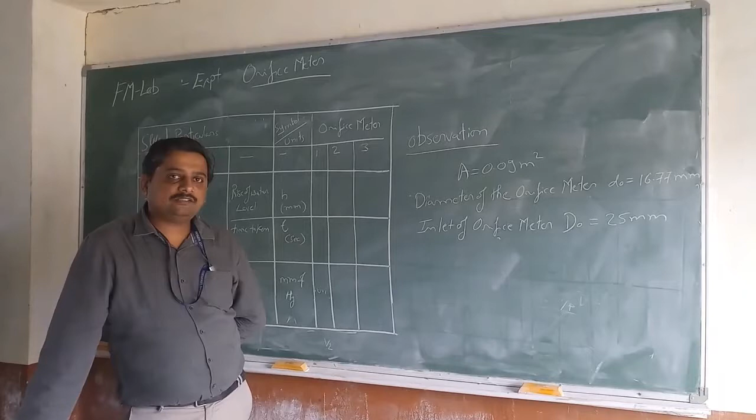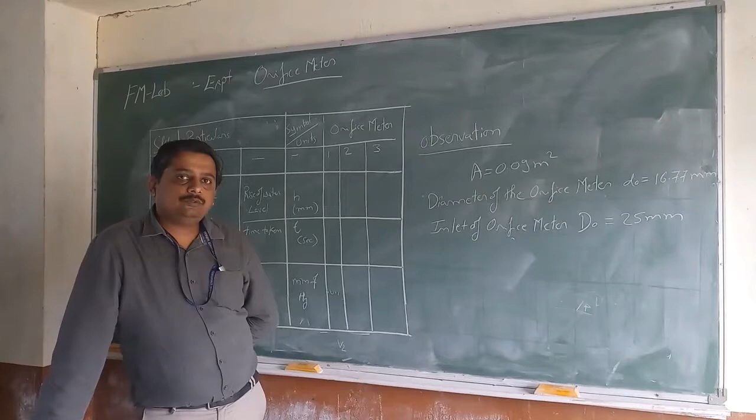Today we are going to see the experiment on the orifice meter, and this experiment is a part of the fluid mechanics lab for the 4th semester as per the VTU curriculum. The orifice meter is a flow measuring device which is used in a pipe, and we need to find out Cd here.

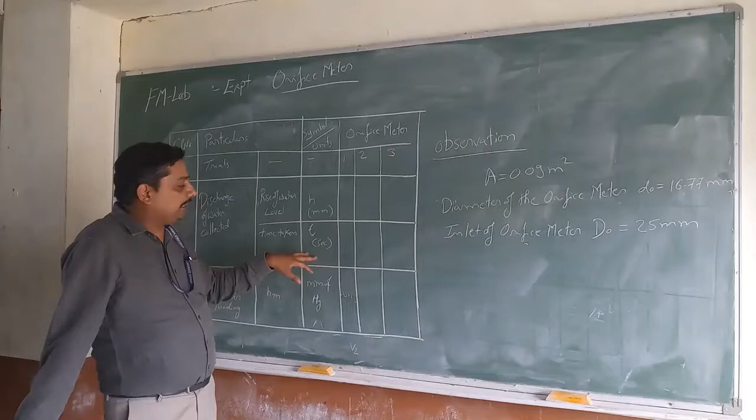The aim of the experiment is to find out the Cd value, that's the coefficient of discharge, and this is the observation table. You need to find out the discharge of water collected with respect to a rise in height of water of 10 centimeters and the time taken to rise to 10 centimeters height.

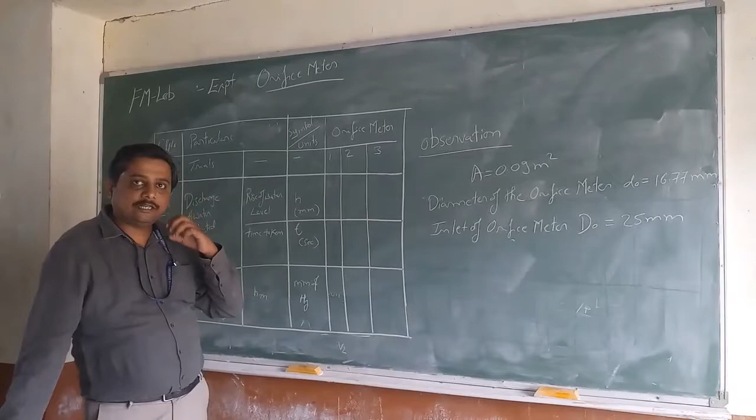You need to find out the differential manometer reading with respect to the left limb and right limb, given as H1 and H2. We need to find the difference of that for each set of readings. The observation here is the area of the tank, that is 0.09 square meters.

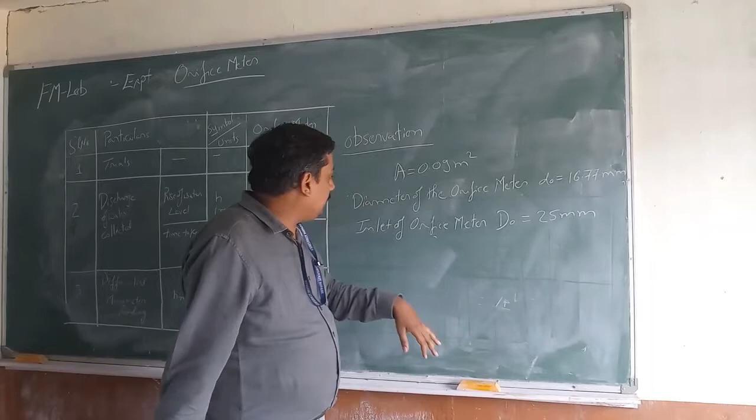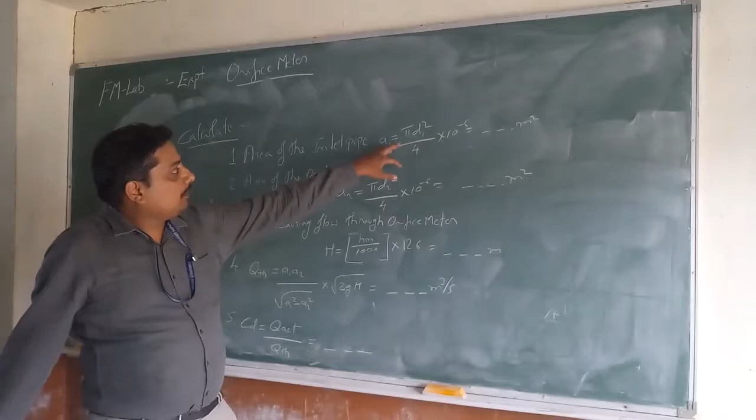The diameter of the orifice, that is D0, equals 16.77 mm. The inlet diameter of the orifice meter, that is D1, is 25 mm. We are going to find out the area of the inlet pipe, that is A1 equals pi D1 square by 4 into 10 raised to -6, in square meters.

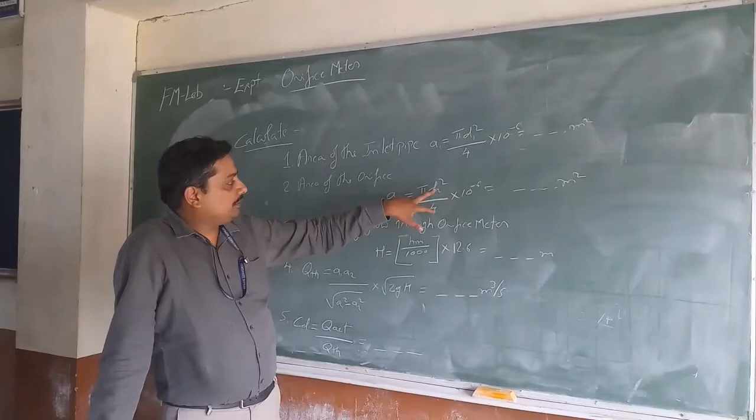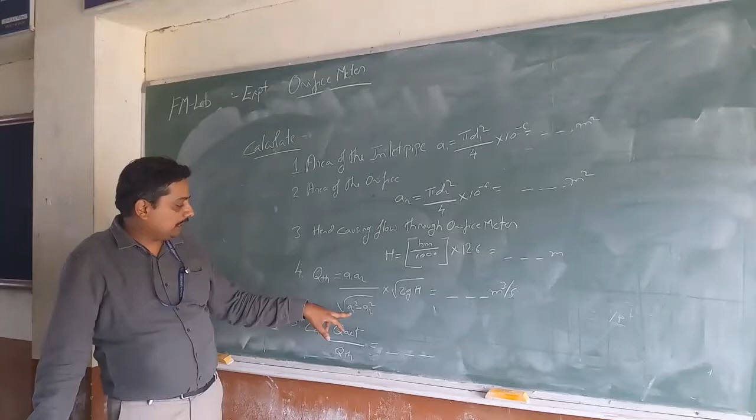Again, the area of the orifice, A2, is pi D0 square by 4 into 10 raised to -6. Then we are going to find H, that is Hm by 1000 into 12.6. Then we find Q, which equals A1 into A2 divided by root of A1 square minus A2 square, into root 2gH. Then we are going to find Cd.

So Cd is nothing but Q actual by Q theoretical. We are going to do this in the next coming videos.

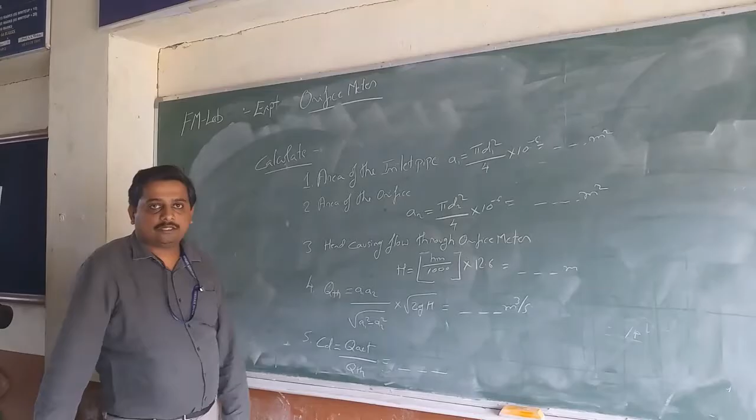Hi everyone. Today we are going to see an experiment of the fluid mechanics lab, which is a part of the 4th semester as per the VTU syllabus. Today we are going to take up the experiment on the orifice meter. This is an orifice meter which has a circular plate inside it. It has a hole, and the hole dimension will be half of the diameter of the pipe.

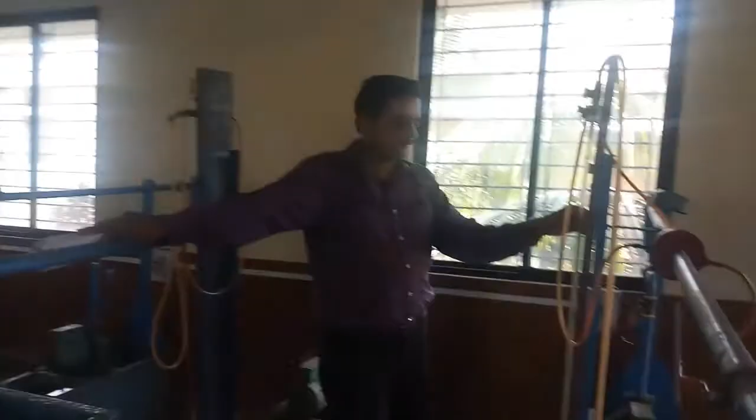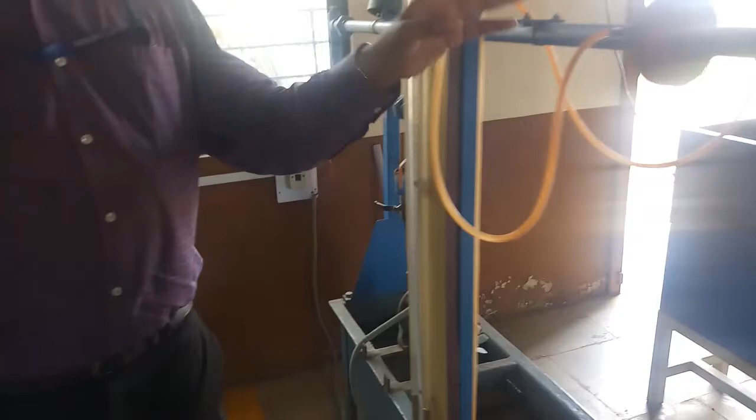It's a flow measuring device, and it is connected to a differential manometer. You can see here this is a U-tube differential manometer. We have a centrifugal pump here, which is used to pump the water, and the water is allowed to pass through this orifice meter.

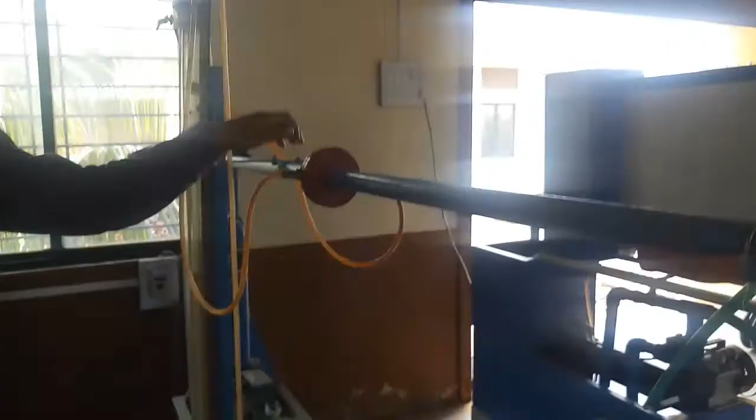Then it is collected where we measure the actual discharge, and then it is passed back to the pump. So what's the aim of this experiment? The aim of the experiment is to find out the Cd value, or you can say it's a verification of Cd.

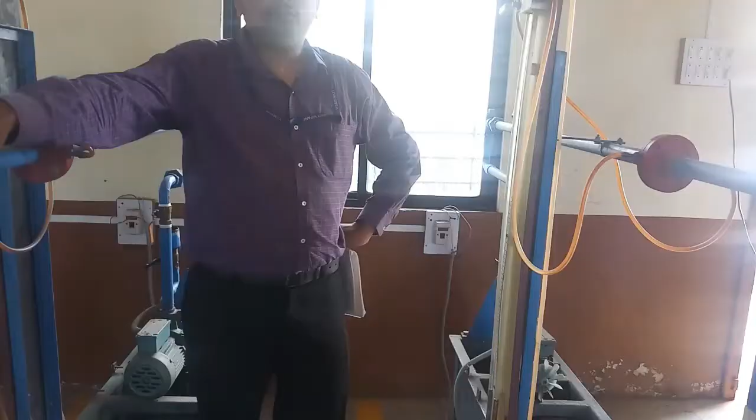So what we are doing here is finding out the Cd value, or verifying, or you can say calibrating the orifice meter. You can use either word: calibration, or finding out the Cd value. The Cd value here lies between 0.6 to 0.65.

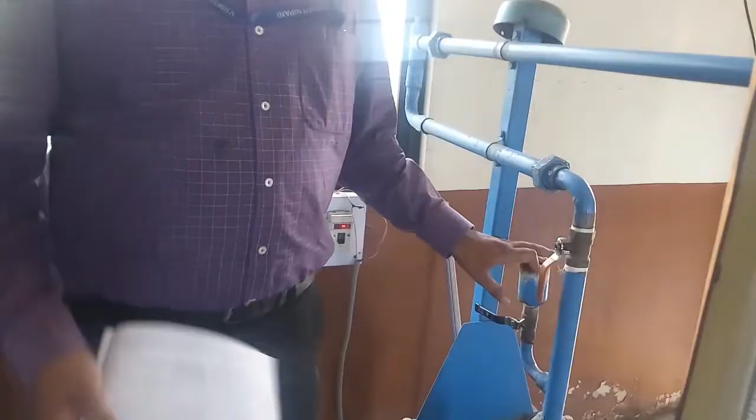So how to conduct this experiment? First you need to start up the pump. Before you start up the pump, you do the timing work. Put the reading here. There are two limbs, one is the left and one is the right limb.

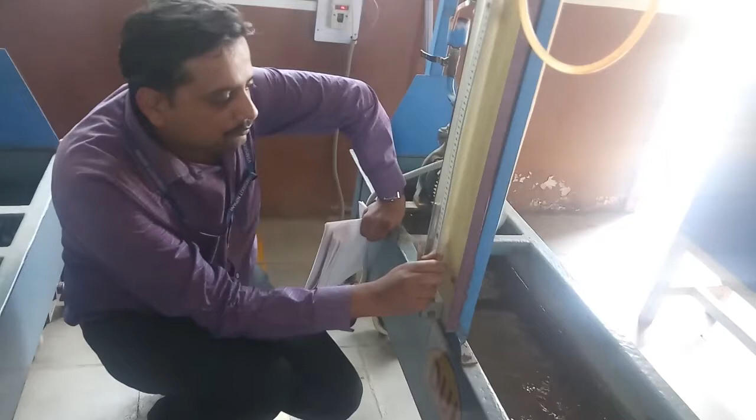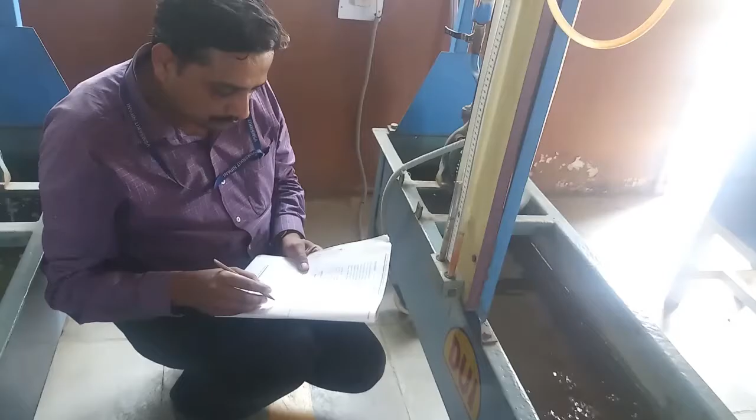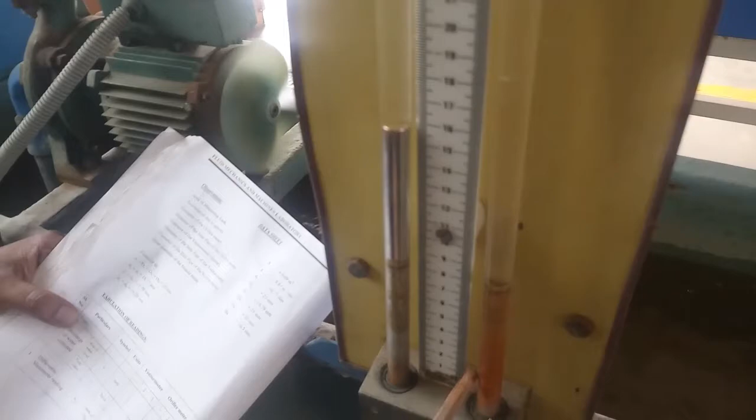Now with respect to the differential manometer reading, you can see here the left limb is around 15.8. So I am going to write that value, 15.8. Now the right limb is around 1.8. So I am going to write the value of the right limb here.

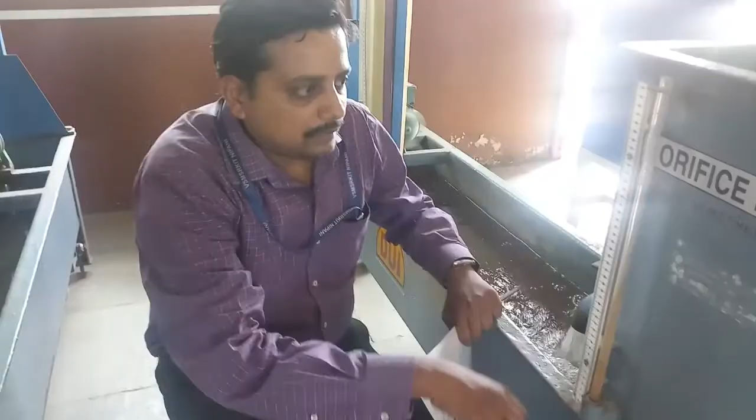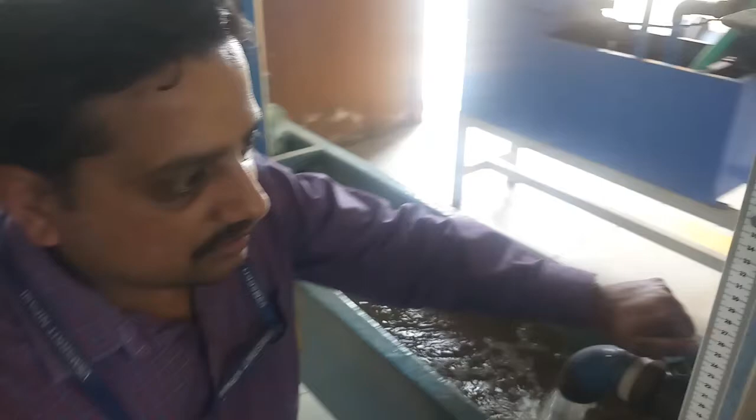That is 1.8 over here. Now what I'm going to do here is take, imagining a height of 10 centimeters, how much time it is taking to fill that water. So now I'm going to close this discharge valve over here. Okay, I'm going to put a clock around 24.

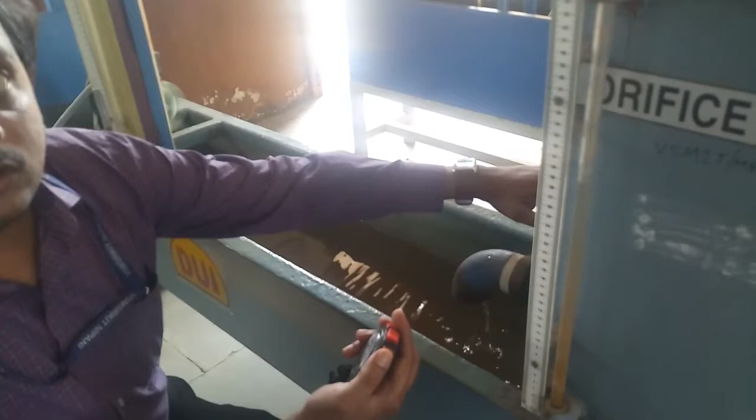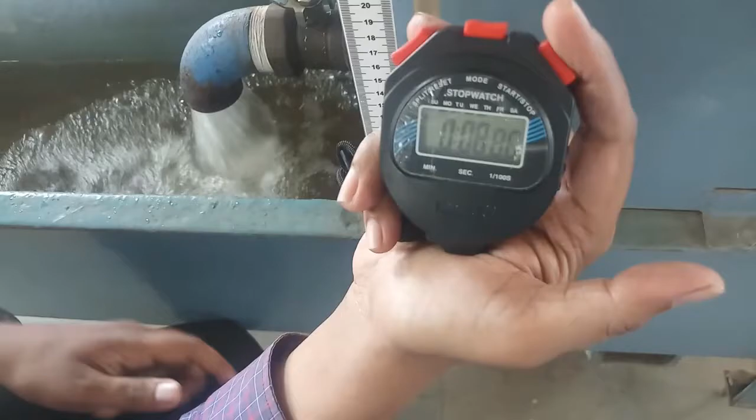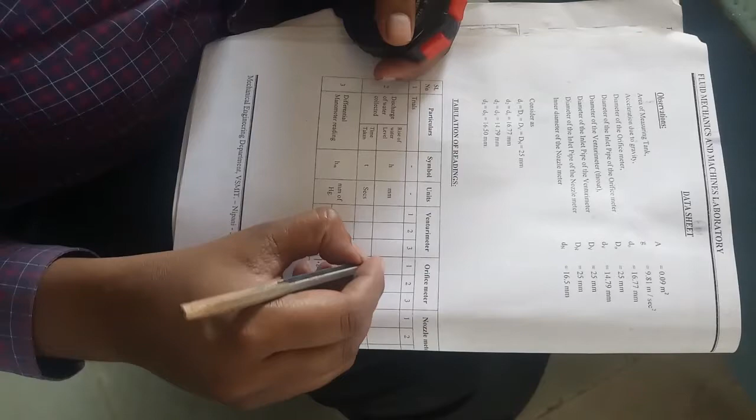So I'm going to start with respect to 24. I'm going to take the reading with respect to 34. So now with respect to 34, it is around 8.88 seconds. So I'm going to write that seconds like 8.88. So the height is around 10 centimeters. So that is around 100 mm over here. Okay. So this is my first set of reading.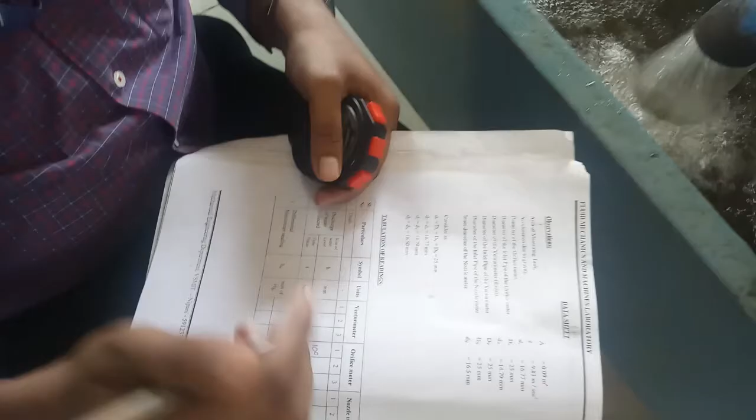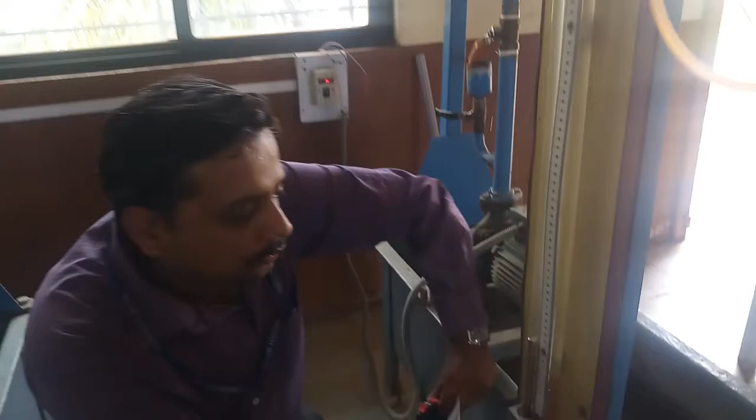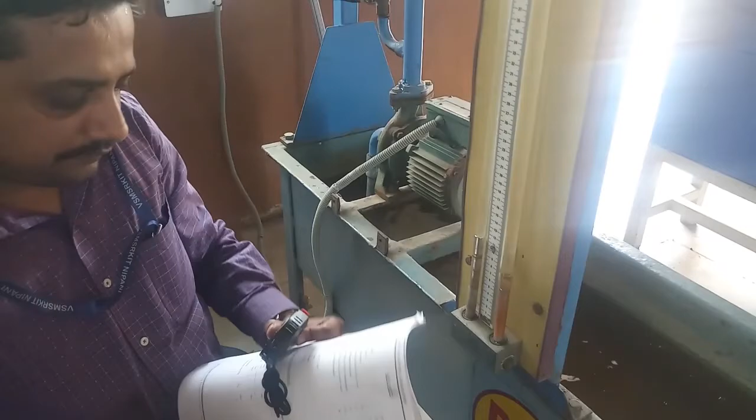So similarly for the second set of reading, I'm going to vary the flow over here, and with that variation in flow, I'm going to note the differential manometer reading with respect to the left and the right limb. So now it is around 11 centimeters with respect to the left limb. Now with respect to the right limb, it is around 6.5. So that I'm going to mention over here.

And now with respect to collection time, I'm going to take the actual readings with respect to that collection time. So now here I'm going to take in 15 centimeters. My stopwatch is not working properly. I'm going to reset it.

Okay. So now I'm taking 18 as an imaginary point, and with respect to 10 centimeter height, it will be around 28. So now for that I'm going to take it. Okay, so it is around 16.34. So 16.34 seconds, and the height is around 100 mm.

Okay. So for the third set of reading, again I'm going to vary the discharge. Again, when I vary the discharge, there will be a difference in pressure. I'm going to take the left and the right limb reading. So here it is around 9.2. So I'm going to enter that around 9.2, and the right one we have got around 8.4. So that I'm going to note down over here.

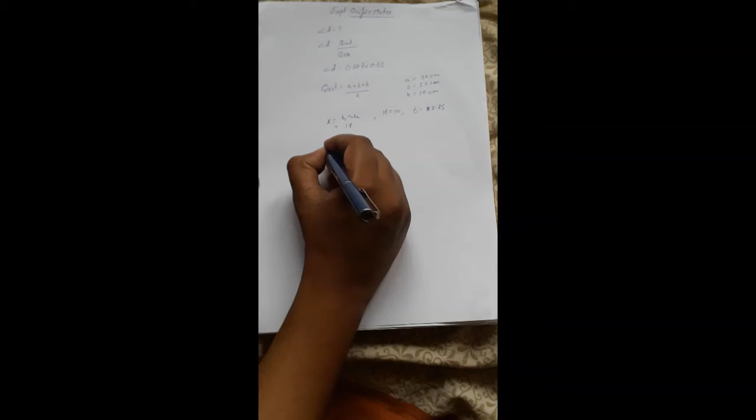All are in centimeters. So now the value of X is the difference in manometer reading of the left and right limb, that is H1 and H2, which we have already taken from the experiment. So here it is 18, H is 10, and for this first set of reading, T is equal to 8.75. First, we are going to find out the value of A1. Okay, so we need to find Q theoretical.

So Q theoretical equals A1 A2 under root 2GH by under root A1 square minus A2 square. So we need to find A1 and A2 first. For that, we are going to find A1 equals pi by 4 into 2.5 square. So the value is around

4.9 centimeter square. A2 equals pi by 4 into 1.677 square. So we have got a value around 2.209 centimeter square. So this is the first part. Now we need to find the head causing flow of water through the orifice.

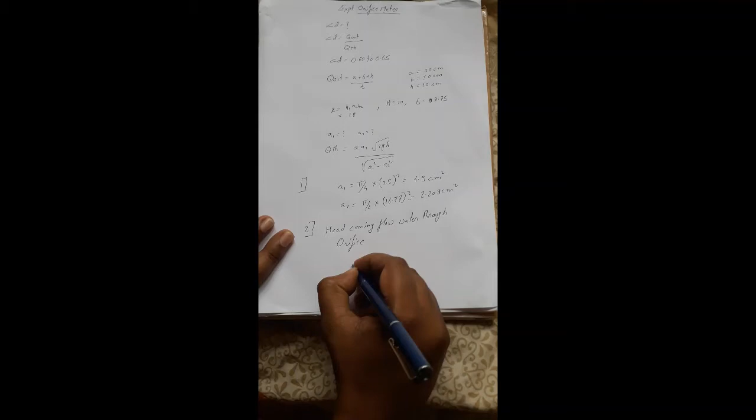So H here equals SM by S minus 1 into X. Here SM is the specific gravity of mercury, that is 13.6. S is the specific gravity of water, that is 1, minus 1. X is the differential manometer reading, that is 18. So now H equals 226.8 centimeters.

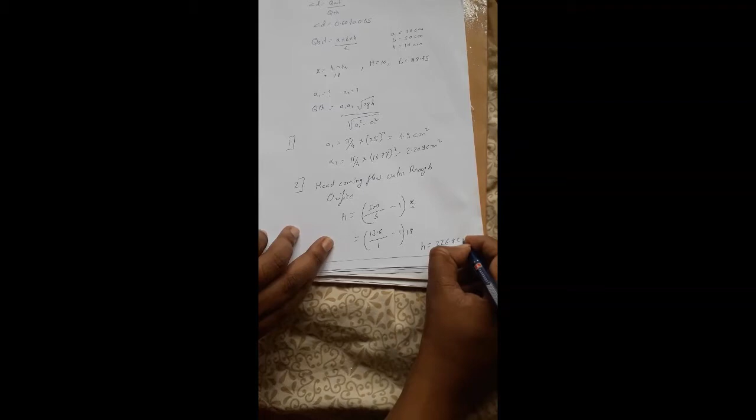So next, you need to calculate the fourth one, Q actual. For Q actual we have the formula A into B into H divided by T. A is 30, B is 30, that is length into breadth into height. Height is 10, because we have taken a 10 centimeter rise of water, T is

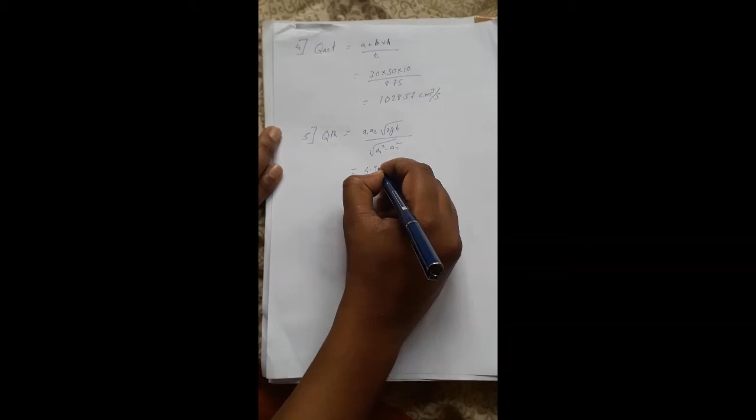8.75. So the Q actual value will be around 1028.57 centimeter cube per second. Now we are going to find the value of Q theoretical. Q theoretical equals A1 A2 under root 2GH by under root A1 square minus A2 square. That is 4.9 into 2.2 under root 2 into 9.81 into H, which we found earlier, 226.8.

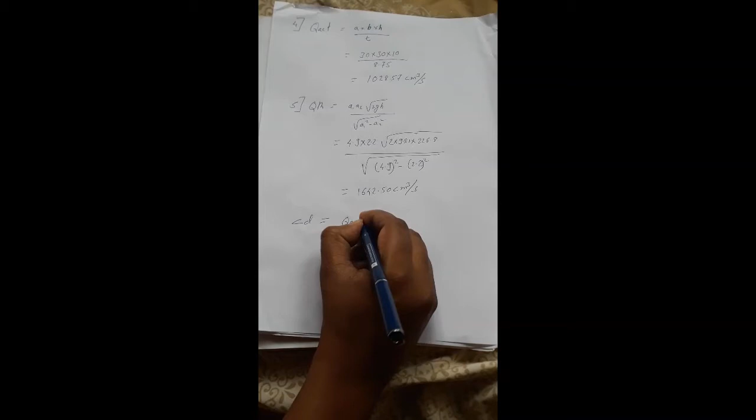Divided by the under root of 4.9 square minus 2.2 square. So we got a value around 1642.50 centimeter cube per second. Now we are going to find CD. CD equals Q actual by Q theoretical.

Now we have the value of Q actual, that is 1028.57, divided by 1642.50. So we will have a value around 0.626. This is the value of CD. In the same way, we need to find the CD value for all the trials. So this is how we do the calculations of the orifice meter.

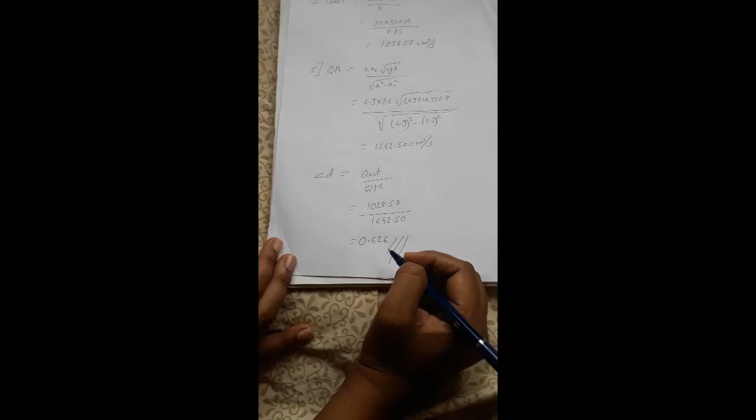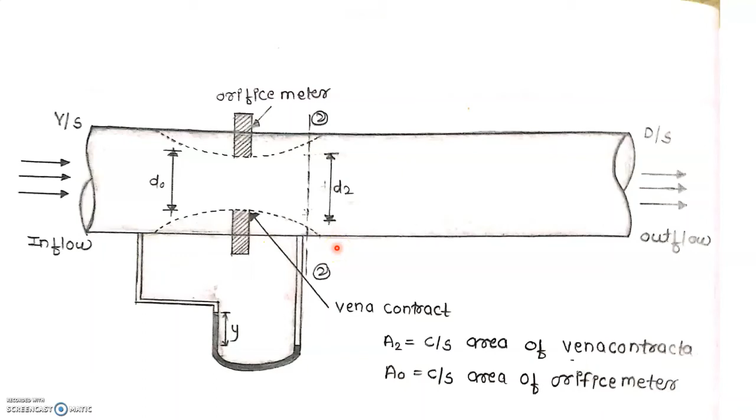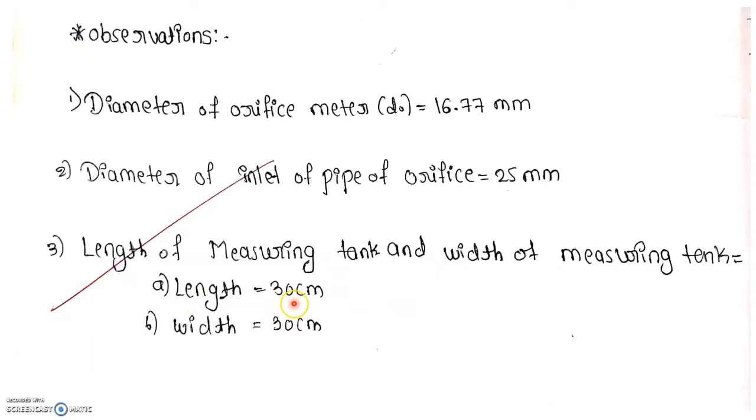In the observations they have given the orifice diameter D naught, that is 16.77, and also the inlet pipe diameter, 25 mm. This part is already given in the manual. So you have length A as 30 centimeters and breadth B as 30 centimeters. When we conducted the experiment, we recorded this data.

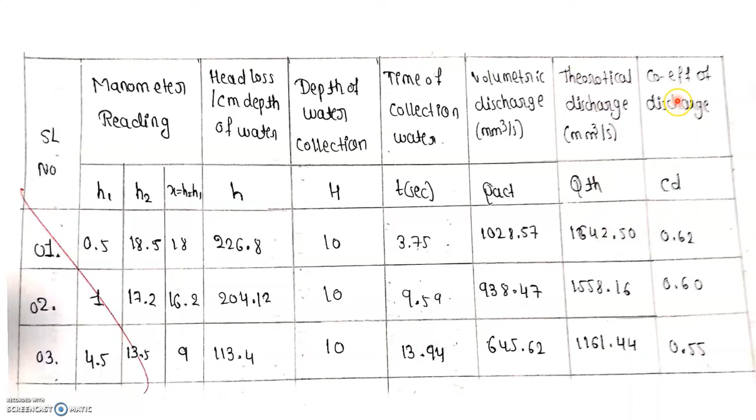For the first trial, you can see we have recorded the left and right limb readings, and their difference X is represented here. And this is the H which is calculated; I will show you that calculation further. This is the 10 centimeter depth of water collected and the time taken for that. And they have calculated volumetric discharge, theoretical discharge and coefficient of discharge for all three trials.

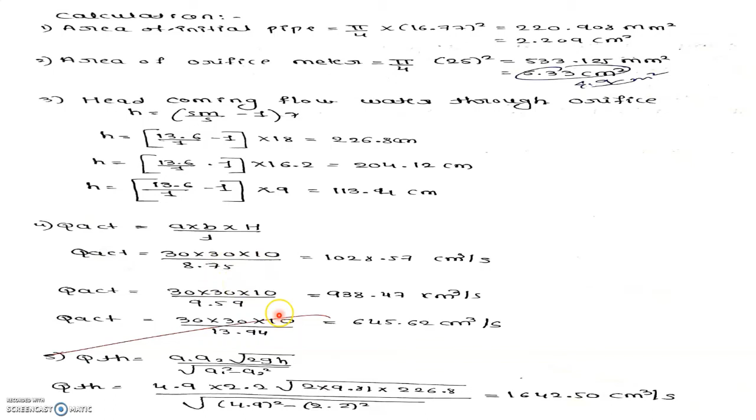You can see here the H has been calculated. The area has been calculated here. This was wrong; I have corrected it. They have calculated Q actual using this formula, as we saw in the earlier part. They have calculated CD from the three trials and got an average CD value of 0.6. So it shows that it has been calibrated. So this was regarding the data sheet.